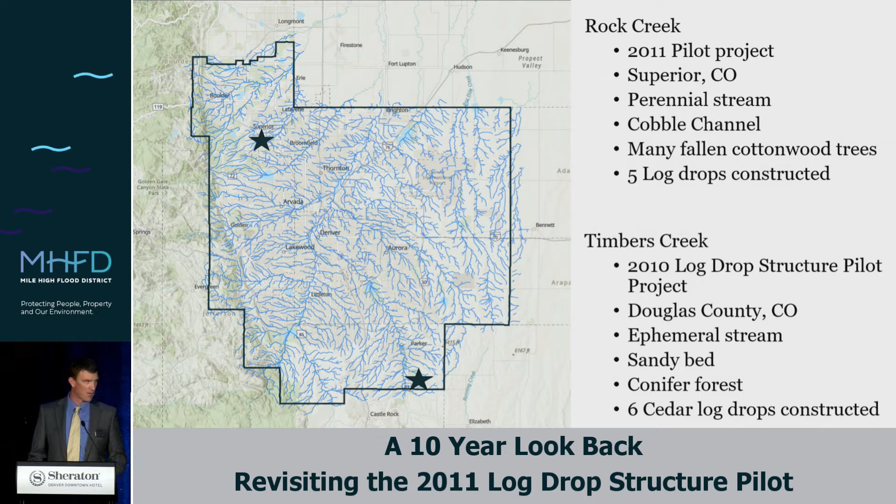The slide here shows the location of the two efforts. Timbers Creek is in the far southeast portion of the district, and that was originally done in 2010 and managed by Laura Kroeger. And then the Rock Creek effort was in Superior on the northwest part of the district, and that was originally managed by Dave Skuodas.

So the goals of the special study was just to look back on the longevity of these logs, so the longevity. Thanks, Mary Powell, for suggesting that one. And I'd also add that there was originally a white paper pulled together for the Timbers project in 2010, but no paper was really pulled together for the Rock Creek effort. So I really wanted to set these two projects up for continued success and monitoring. And so one of our goals was just to document the Rock Creek effort.

And really one of my goals with this is just to try to understand the longevity of these logs and try to get some confidence with how log drop structures are used. I should add that the logs were tested using non-destructive methods. So we essentially tapped on the logs with a mallet to listen for hollowness or any internal deficiencies, and then used a metal rod to poke on the outside of the logs to see if they would deflect.

The project is pretty much a little kid's dream. You get to go get paid to play in the creeks while whacking at things and poking at things. So sounds like a good day to me.

So the first of the original projects was on Timbers Creek. Like I said, the white paper was pulled together, and that did a good job of really talking about the basis of the design. And for simplicity, we've just appended that into the current report. And the log drop portion of this one essentially included six 20-foot long cedar logs that were put into a drop structure that was fairly long and spaced out, but in total it covered about 6 foot of total drop.

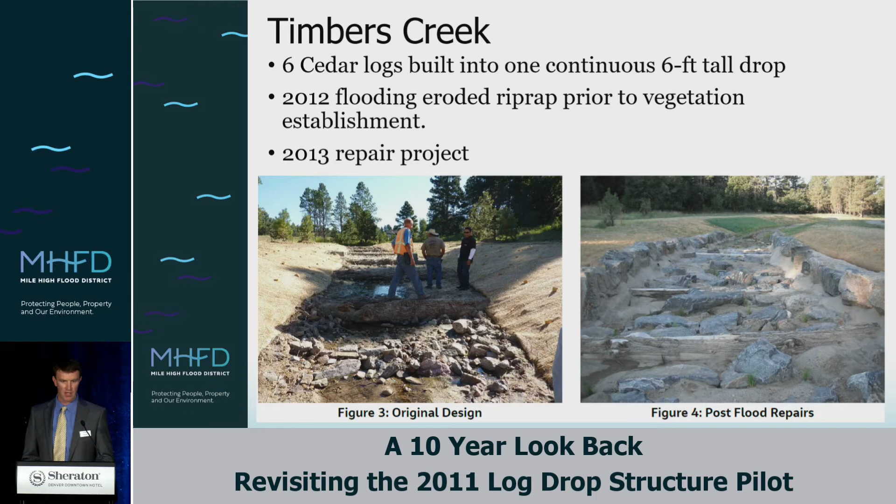And so I think this might be one of the more notable takeaways from this effort. If you do plan on grouting up against a tree, definitely consider taking off that bark layer. It's going to disappear on its own either way. And then I think the other takeaway is that these logs are definitely starting to look a little sun-baked and maybe a little dried out.

Keep in mind that this is an ephemeral creek, so the vegetation is much lower, it's not as vibrant, and so these logs are definitely exposed to much more sunshine. And one takeaway from the Marshall wildfire is that all the wooden retaining walls and wooden fences disappeared. They burnt up and are gone. And so in a condition like this, these logs might actually burn up.

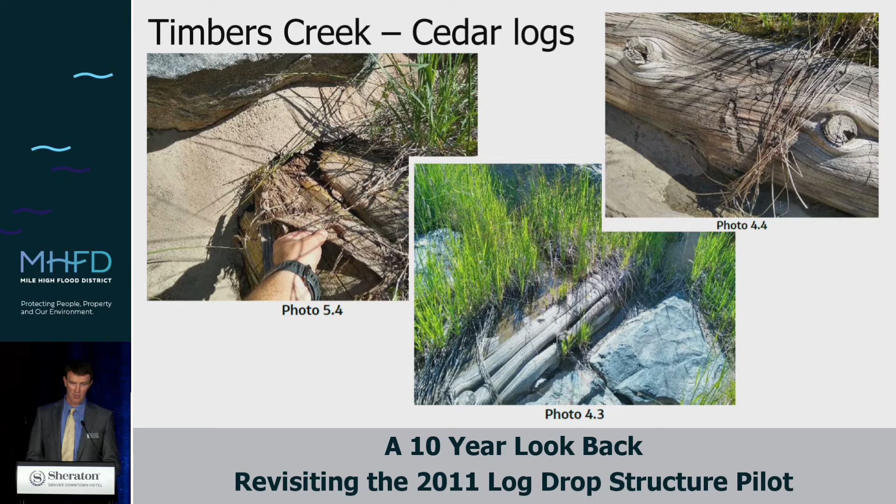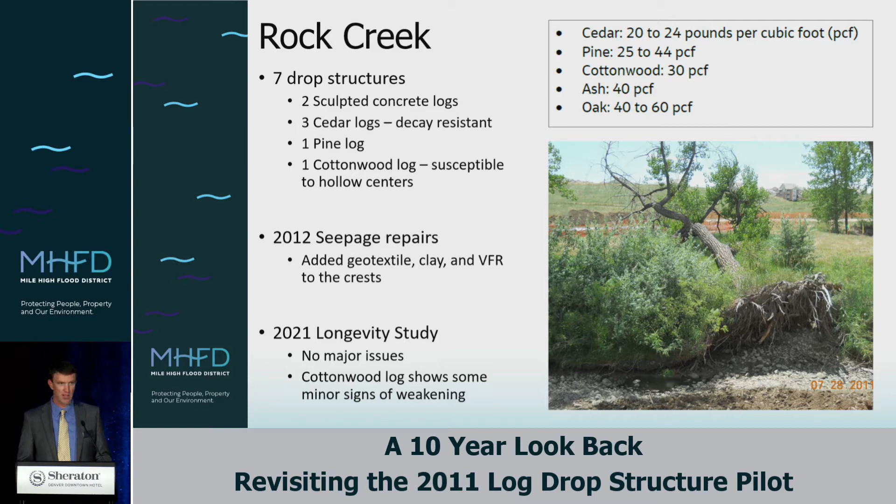So on the left there is a cedar log. That's the material of choice because it is resistant to decay. That's why you have cedar fences, cedar shingles on your houses, but definitely not a local material and not cheap. Pine log is next. Some maybe thought of it being a little bit more local, but as it turns out, if you order one of these from the timber yard, it's probably coming from Canada, so know where your logs are coming from. And then you've got cottonwood logs.

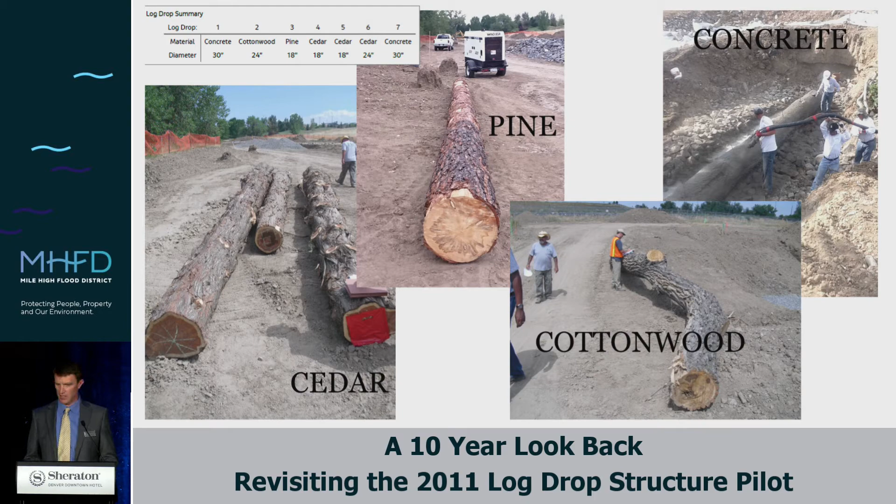Cottonwoods are obviously a lot more prevalent in some of the open space areas that we're working in. Sometimes we're actually having to take them out. So it'd be great if we could reuse them in some of these log drop structures. Now, the problem with cottonwoods is that they often have a hollow core, and they're also typically made up of a softer wood, so unsure if they're going to stand the test of time. And then for the purpose of this presentation, concrete is considered a log, so more to come on that later.

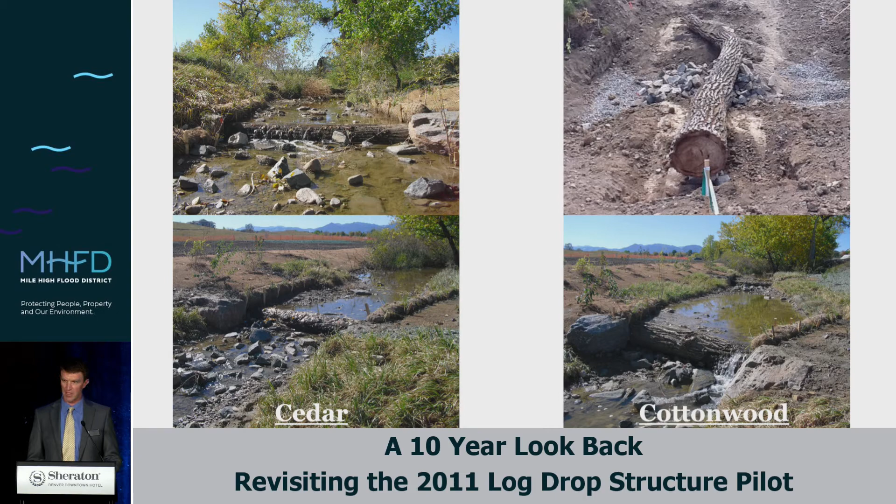The photos here are just right after construction and during construction. And I think the notable thing is that the curved configuration of that cottonwood log definitely made for some difficulties in placing it. So the straighter the better when it comes to placing your logs or choosing your logs.

You'll notice that the flow is concentrated to one side, and that goes back to that curved alignment with the cottonwood tree, making for difficulty in getting that thing flat and the water evenly distributed over the crest. And so this log did show some give when being pushed or poked with that metal rod. And so the wetting and drying cycles that we're seeing from that uneven distribution are probably going to shorten the service life of this log. Similar to the Timbers Creek project, all the bark is gone from these logs.

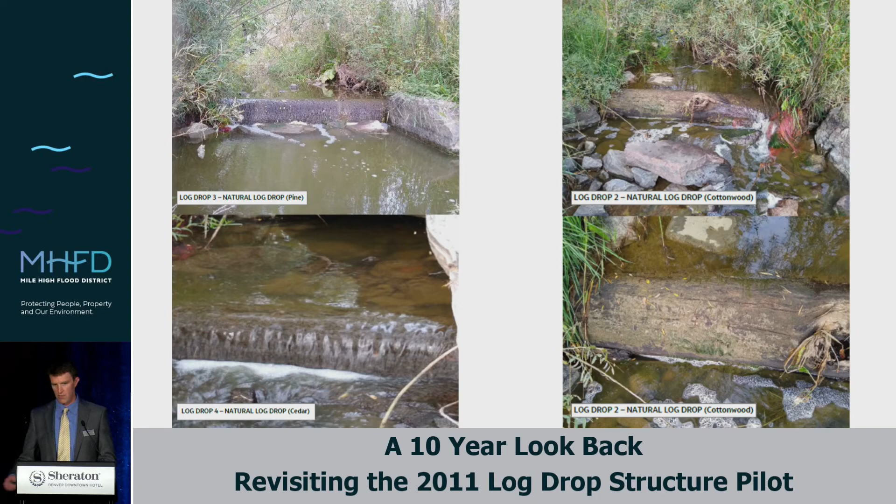And so the project did require some minor repairs on a few of the drop structures just to get water to basically go over the logs instead of under them. So definitely want to incorporate cutoffs into your design at the crest, and then really emphasize it during construction, make sure those contractors are kind of hitting the design.

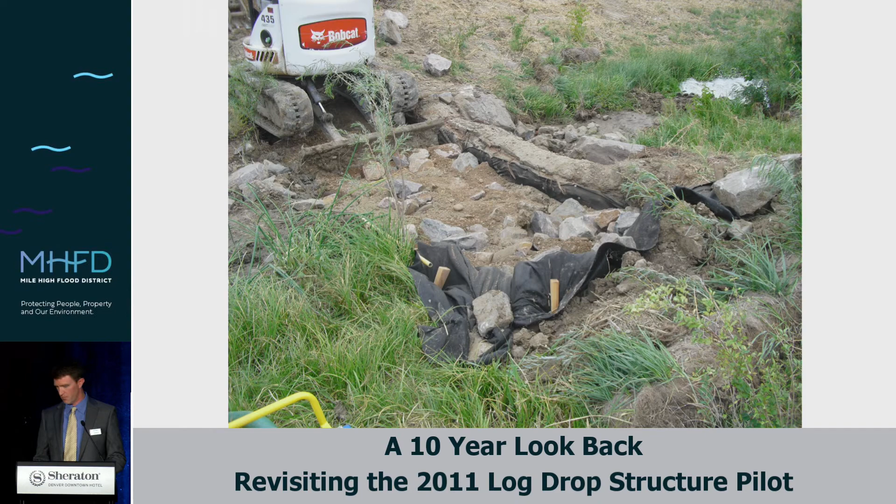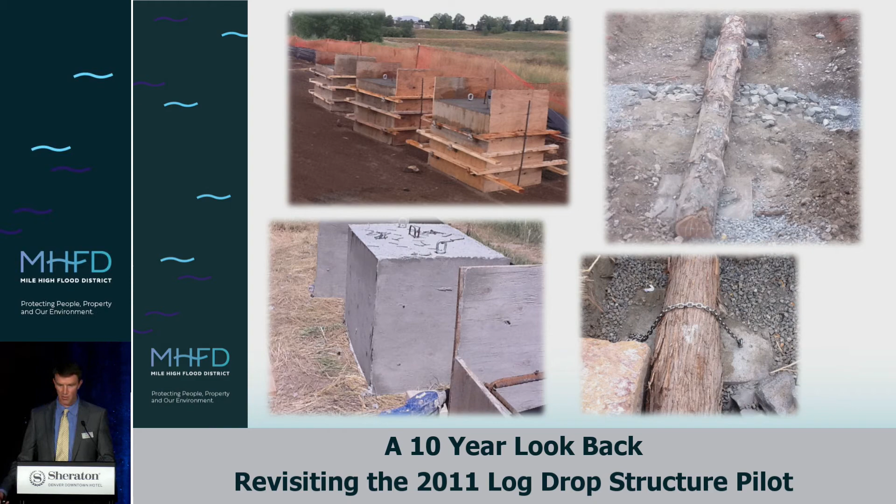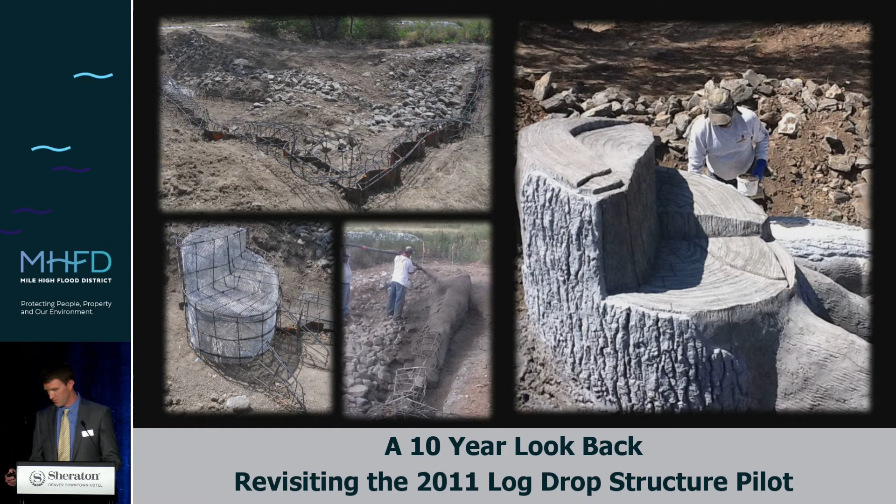So here's what the logs look like right after construction. Definitely realistic, and I know that Dave Skuodas thinks that this will be the one that lasts the longest. And I think he's right. One thing I'll point out is, this is right after construction. If you go out there today, you probably won't even be able to find this drop structure. It's just overgrown with willows and other vegetation due to the base flows.

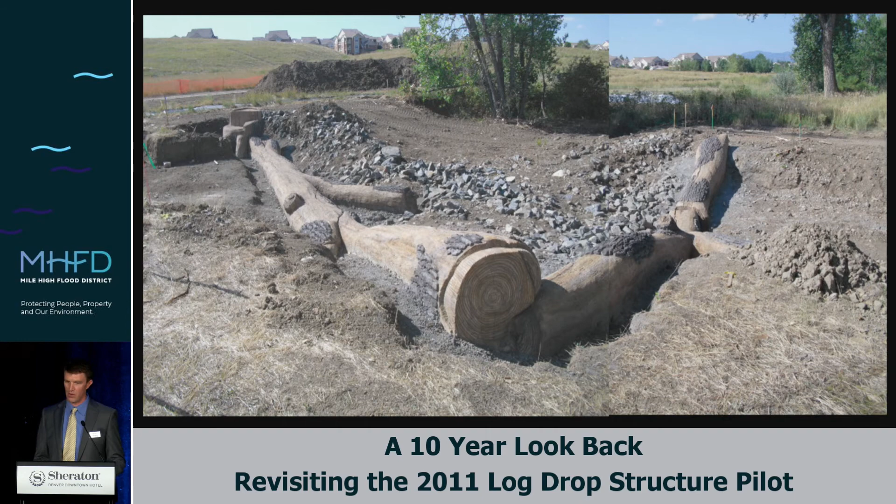And so in talking with Dave, I think that the structure of this detail and cost is probably better used in other areas where it's maybe going to be a little bit more appreciated by the general public.

Now, finally, here are the actual conclusions from Dave and Kyle's original 2013 CASFM presentation. Generally speaking, I think all these conclusions hold true. One of the things I'd add is the speaker notes on the original presentation questioned how they would define success. And at the time they defined success as having these structures in this project still functioning 50 years from when they installed it. And so in general, here's the lessons learned from this current effort, but I think 10 years down the road, it's looking like they're well on their way to that 50 years.

The cottonwood log probably needs to be monitored a little bit more closely. But I think we're well on our way. I'll check back in 10 years. Actually, hopefully not.

If you want to dig into more on this, and you want to learn more about log drops, just go to our website. At the top of our website, there's a little search bar there. Simply type in log drops, and you'll find our paper. I'll add this is also where I go to find other white papers on things such as full spectrum detention, EURV, void-fill riprap, those types of things.

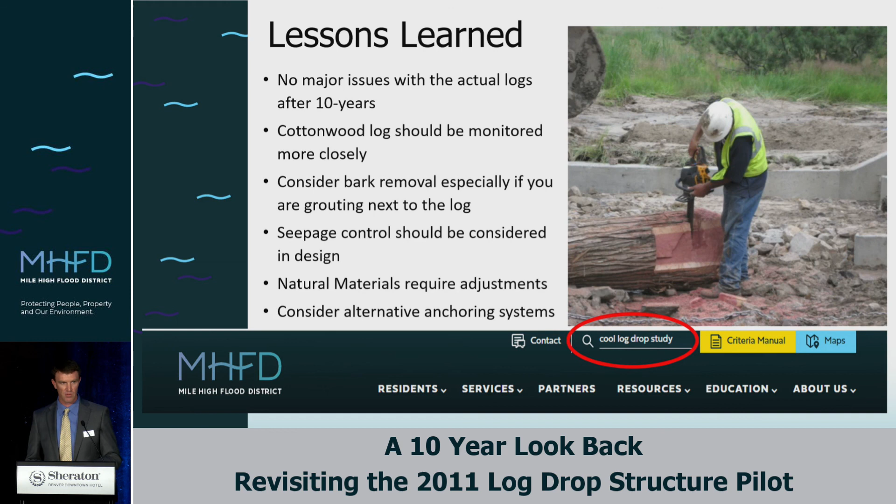And then finally, I'd just add that at the district, we really pride ourselves on trying to be a learning organization. We want to keep pushing ourselves and keep pushing the industry to keep advancing. And so we really try to put money where our mouth is with that. We set aside funds on a yearly basis for special studies such as this one. If you have ideas or something you think that we should work on, please reach out to us and pitch the idea, and we'll see what we can do to fund the effort for you. So thank you.